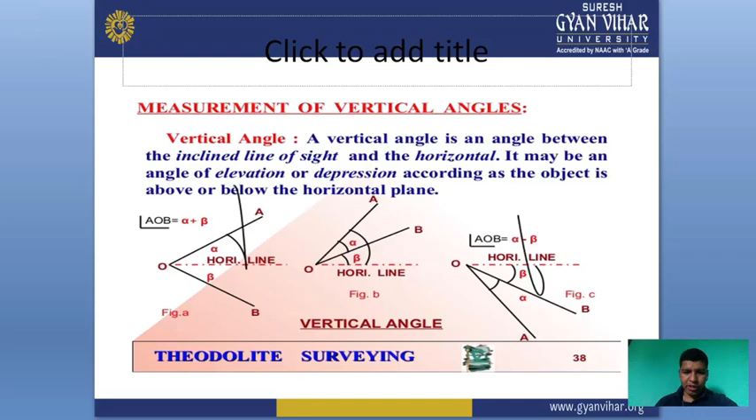See the vertical angle of any sight, that is shown like angle AOB, again angle AOB. There are three figures which show the vertical angles of a theodolite survey.

So what are the uses of theodolites? The uses of theodolites are as follows. Theodolites are used for many purposes, but mainly for measuring angles and scaling points of construction work, for example to determine highway points and points of huge buildings.

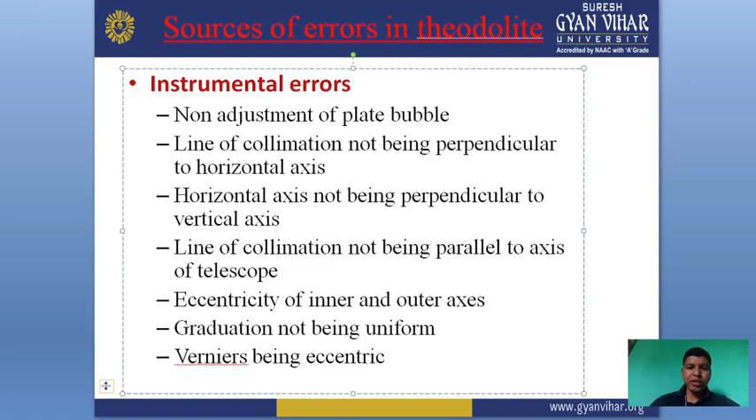Inaccurate centering. This is a very common error, and it is introduced in all angles measured at a given station. Its magnitude depends upon the length of sight. It varies inversely as the length. Inaccurate centering, slip, working the wrong tangent screw, parallax, inaccurate bisection, and other errors are included in observational errors.

Inaccurate bisection means care is not taken to bisect the lowest point visible on the ranging rod. In case of short sights, the point of a pencil or the plumb line may be used instead of the ranging rod.

The error varies inversely with the length of sight. Then other errors such as mistaken setting of the vernier, mistake in reading the scales and vernier, mistake in reading wrong vernier, and mistake while booking the reading can be prevented by checks and precaution.

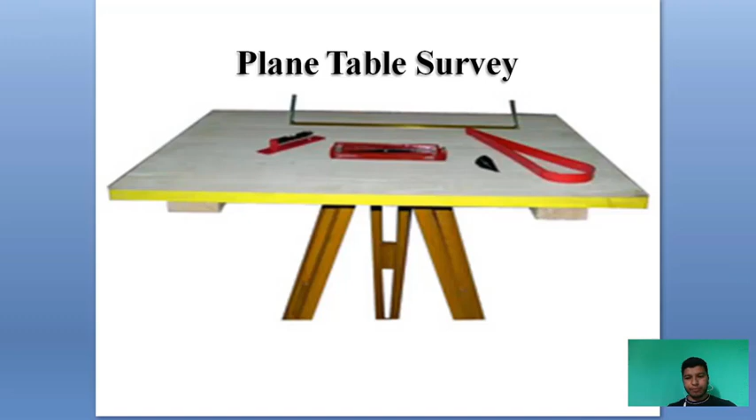and to also understand how field work is carried out with this instrument and how it is useful in engineering. In this topic we will also discuss the principles of plane table survey, instruments, setting up the plane table, method of plane table, advantages and disadvantages, and the sources of errors

in plane table survey. First of all, what is plane table survey, why it is necessary in civil engineering, how it is used, in which method it is used, what are the main advantages and disadvantages, and what are the main principles of plane table survey.

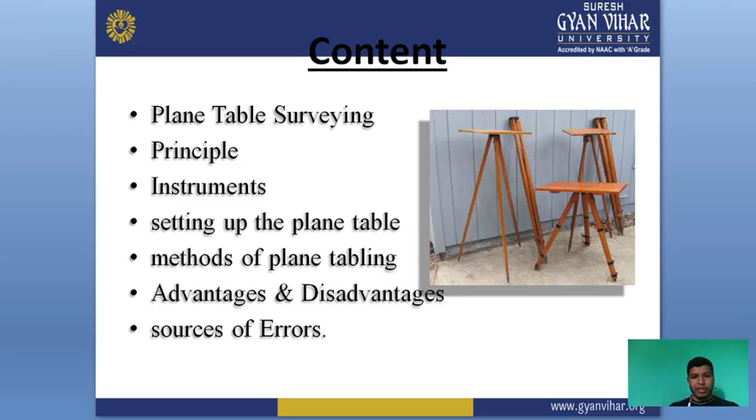Let's start. Basically, plane table survey is a graphical method of survey in which the field observations and plotting are done simultaneously. It is simple and cheaper than theodolite survey. It is most suitable for small scale maps.

The plan is drawn by the surveyor in the field while the area to be surveyed is before his eyes. Therefore, there is no possibility of omitting the necessary measurement. Plane table is also called as plane tabling method.

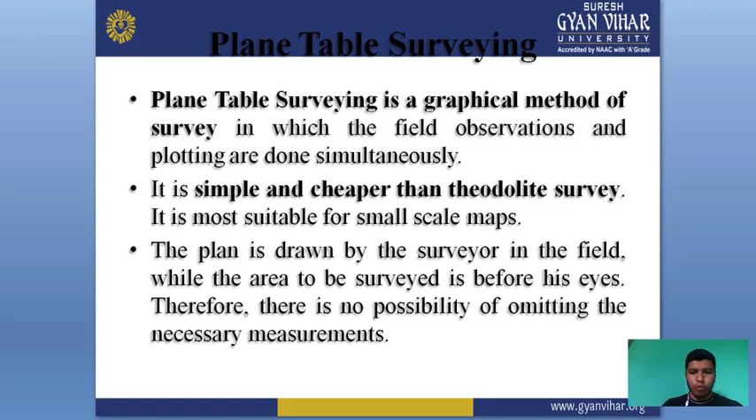The main principles of the plane table survey are: all the rays drawn through various details should pass through the survey station. The position of plane table at each station must be identical. At every station, the table must be oriented in the direction of magnetic north.

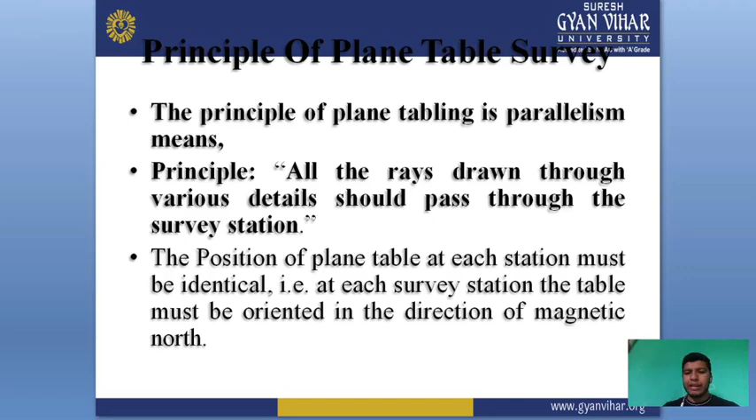The equipment essentially needed for plane tabling is a plane table or drawing board which carries a drawing sheet and is mounted on a tripod stand, and an alidade which provides the line of sight. This is an example of the principle of plane table survey.

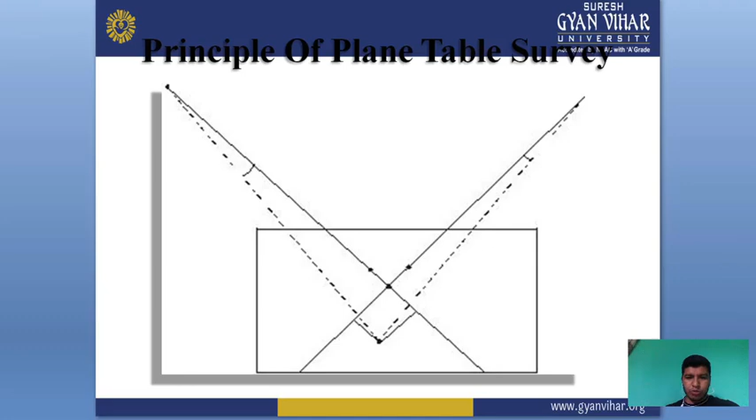We have used a sheet over the drawing board, marking the station which is fixed on the ground, and also marking some points which are shown in the figure.

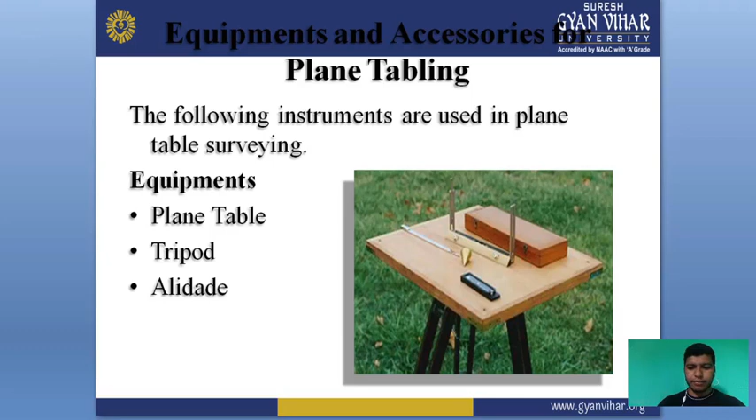The main equipment and accessories used in plane table surveys: the main equipment is the plane table, tripod and alidade. Accessories include trough compass, spirit level, U fork with plumb bob, waterproof cover, drawing paper, pins and drawing accessories.

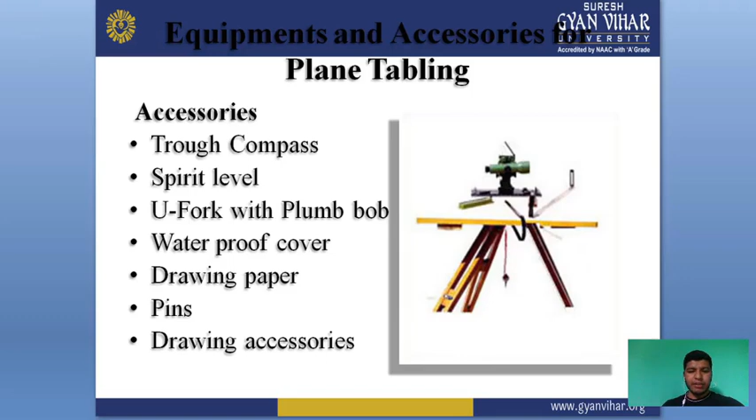The first one is the plane table. The drawing board for the plane table is made from well seasoned wood with its upper surface exactly plane. It is normally rectangular in shape with a size of 75 centimeter into 60 centimeter.

This is the size of the plane table board which is used for drawing in plane table survey, and it is also mounted on a tripod, and clamps are provided to fix it in any direction. The table can revolve about its vertical axis and can be clamped in any position when necessary.

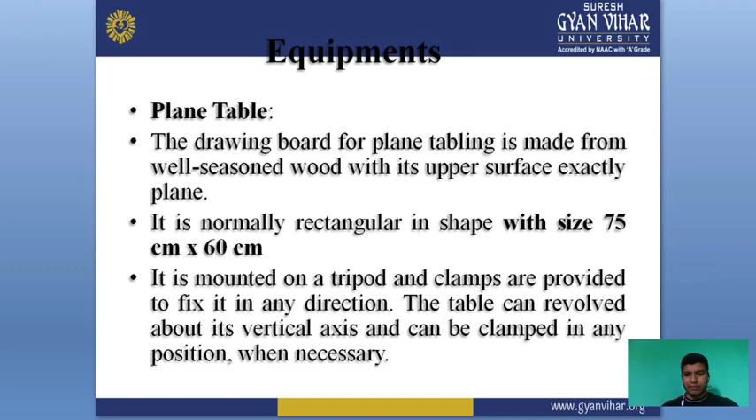This is an example of the plane table, the drawing board which is used for drawing in plane table survey.

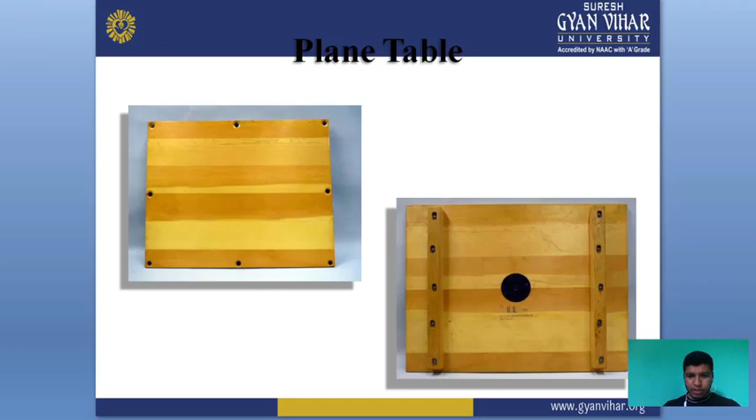It is mounted on the tripod and fixed on the tripod in the ground with the help of clamps. This is the example how we fixed the plane table board and tripod on the surface of the ground for taking the measurement and recording the observations.

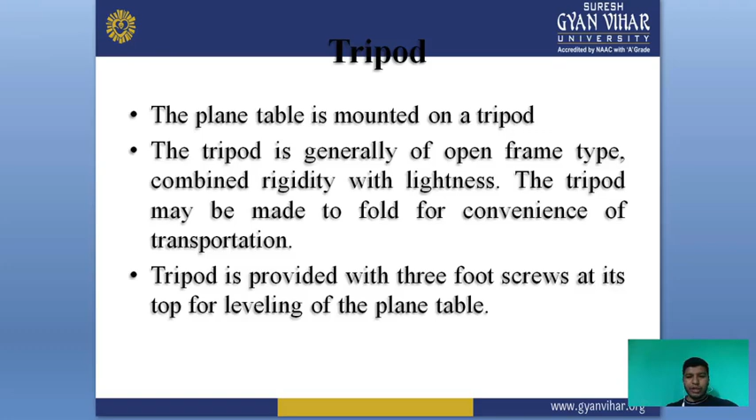Now the next instrument is tripod. What is tripod? Where is it used? Why is it used? Basically the tripod is used in plane table survey for mounting or fixing the board. The tripod is generally of open frame type, combining rigidity with lightness. The tripod may be made to fold for convenience of transportation. It is provided with three foot screws at its top for leveling for the plane table survey.

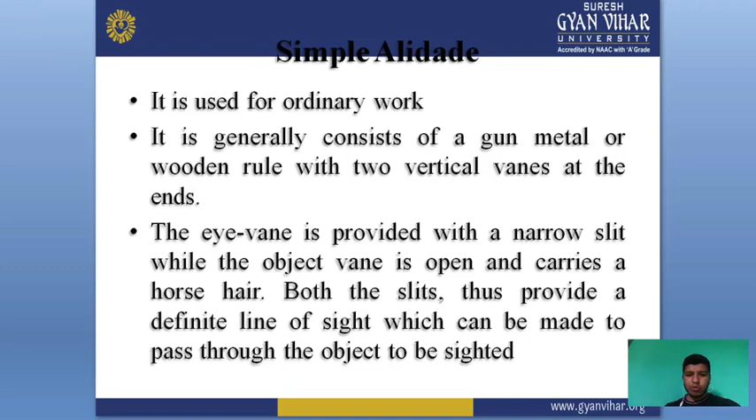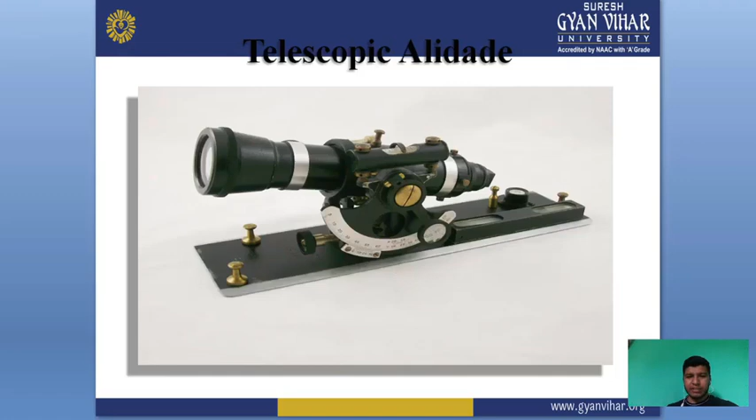In accessories, it also consists of trough compass. What is trough compass? The trough compass is required for drawing the line showing magnetic meridian on the paper. It is used to orient the table to the magnetic meridian. When the freely suspended needle shows 0 degrees at the end, a line is drawn on the drawing paper which represents the magnetic north. Basically, the trough compass is used for showing directions.

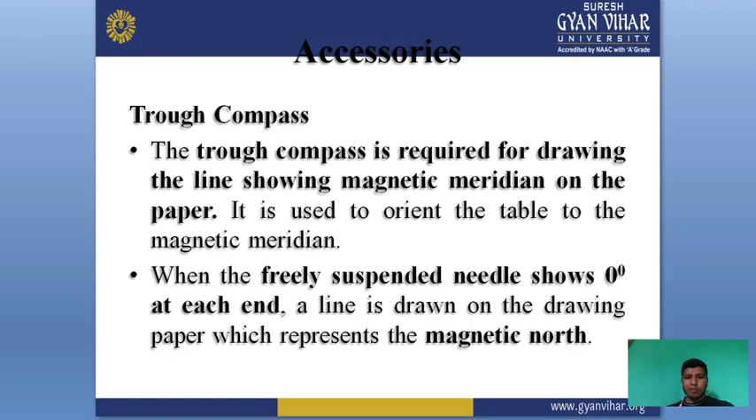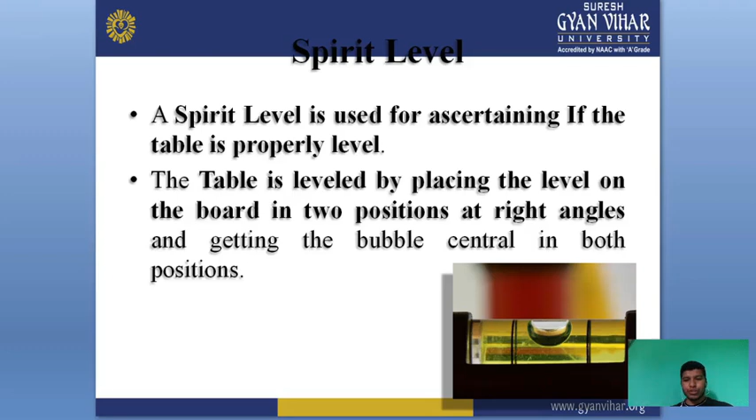Next accessory used in plane table survey is spirit level. Spirit level is used for ascertaining if the table is properly leveled. So it is used for leveling purpose. The table is leveled by placing the level on the board at right angles in different positions and getting the bubble central in both positions. This is the main example of spirit level which is used in plane table survey for leveling purpose. When we level our setup, we can check if our instrument or setup is fully leveled with the help of spirit level.

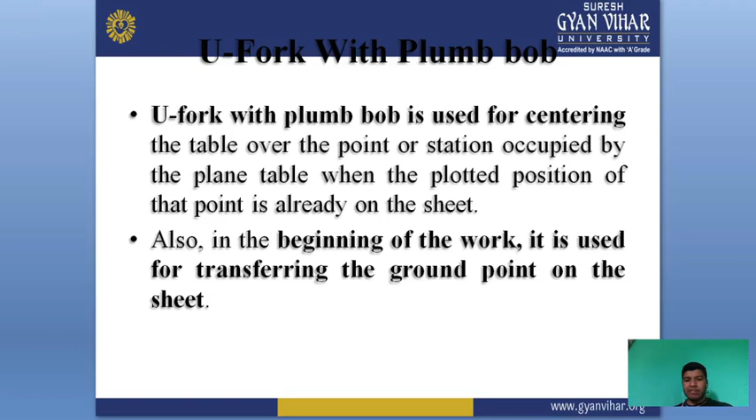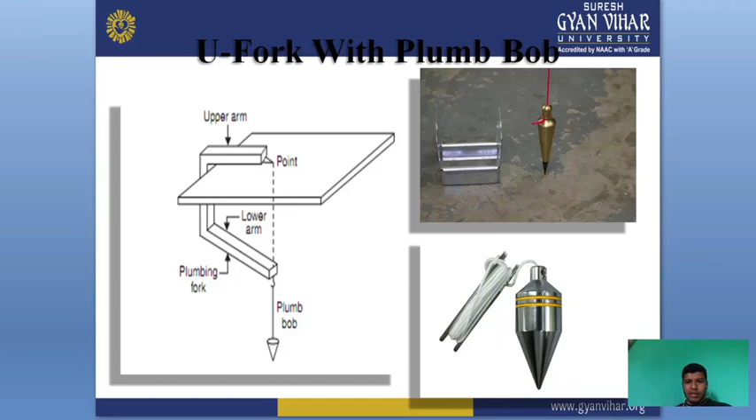Next is drawing paper. Drawing paper is used for plotting the ground detail. When we take the reading, we can draw on the drawing paper as the readings are taken with the help of plane table survey. We can draw the measurement, we can draw the reading on the sheet.

Setting up the plane table. First point is to fix the plane table on the tripod stand. Then second is leveling the table. We have to level our table, then centering the table, then marking the north line, and the fifth and last step is orientation. Orientation means drawing orientation by magnetic needle, or orientation by back sighting.

Advantages and disadvantages of plane table survey. Now we will discuss what are the advantages and disadvantages.

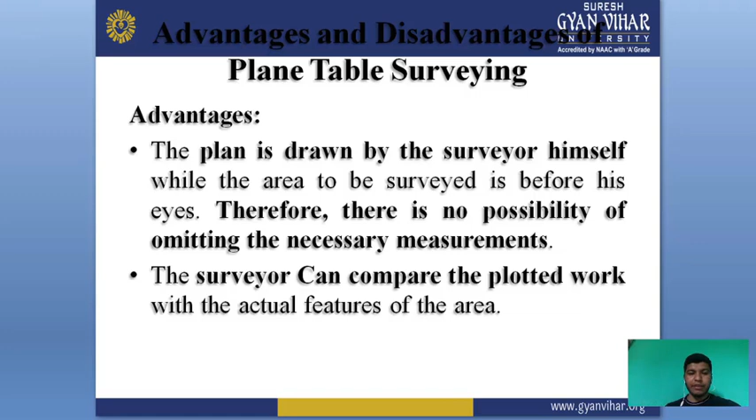The third point is it is the most rapid method used in plane table survey for drawing. It is also simple and cheaper than theodolite. It is more suitable for small scale maps. No great skill is required to produce a satisfactory map, and work may be entrusted to a subordinate.

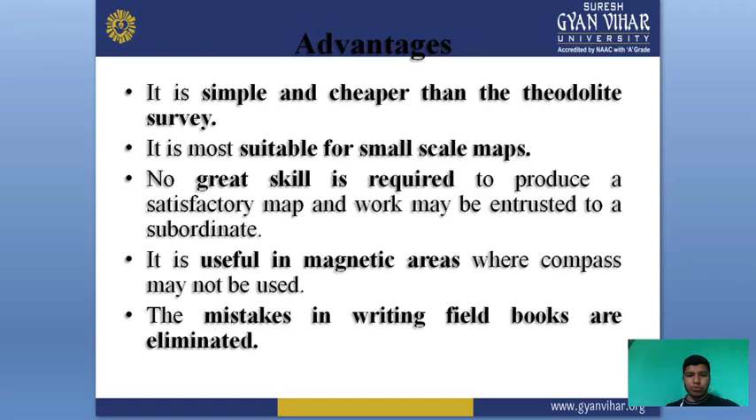It is useful in magnetic areas where compass may not be used. The mistakes in writing field books are eliminated.

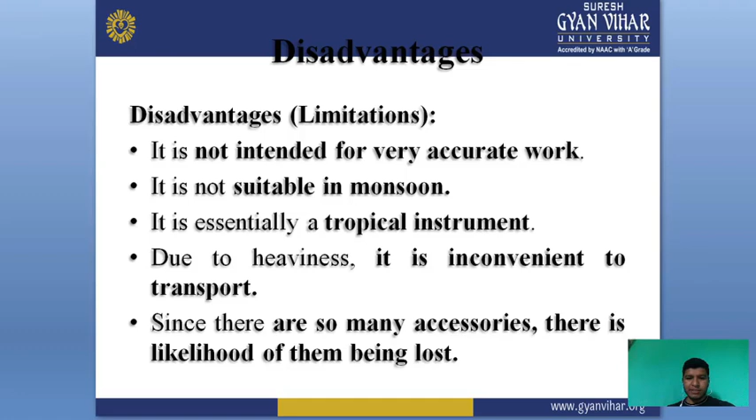Now disadvantages: it is not intended for very accurate work. It is not suitable in rainy season like monsoon. It is essentially a tropical instrument. Due to heaviness, it is inconvenient to transport. Since there are so many accessories, there is a likelihood of them being lost.

Hello everyone. Today we will discuss a new topic, Compass Survey. In this topic we will discuss what is Compass Survey, what are its advantages and disadvantages, and why it is used in civil engineering. So let's start. What is Compass Survey?

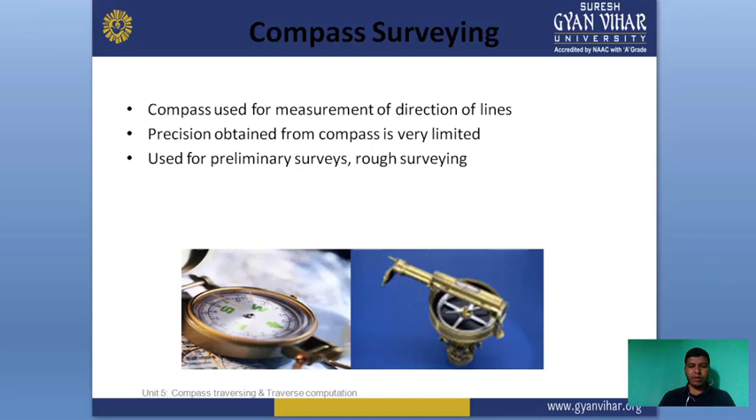Compass Survey is an instrument used for measurement of the direction of a line. Precision obtained from compass is very limited. It is used for preliminary survey, rough survey, and for measuring directions like north, south, east, west. There are two types of compass survey: prismatic compass and surveyor's compass.

There are also some basic terms used in compass survey, like meridian, bearing and azimuth. Meridians are reference directions based on which the direction of a line is measured. The first is true meridian, which is constant. Magnetic meridian is changing, and arbitrary meridian is constant again.

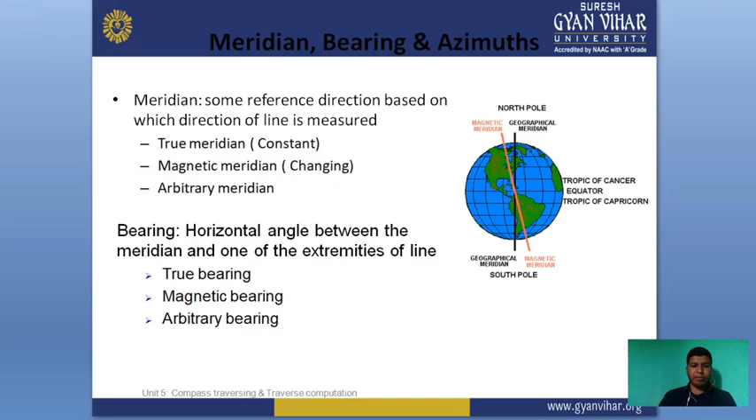Bearing is the horizontal angle between the meridian and one of the extremities of a line, like true bearing, magnetic bearing and arbitrary bearing. True meridian is defined as the line passing through the geographic north and south pole and the observed position. This position is fixed, established by astronomical observation, and is used for large extent and accurate surveys like land boundary. Magnetic meridian is defined as the line passing through the direction shown by a freely suspended magnetic needle.

It is affected by many things like magnetic substances, and its position varies with time. Assumed meridian is the line passing through the direction towards some permanent point of reference, used for surveys of limited extent. There is a diagram that shows the assumed meridian of a boundary line.

The disadvantage of this assumed meridian is that it cannot be re-established if points are lost.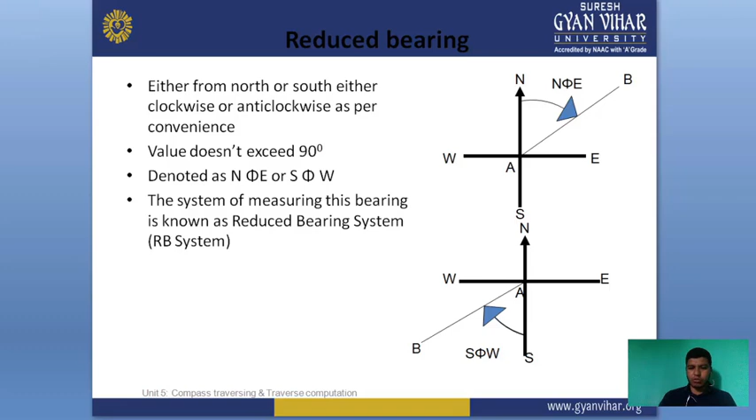In short, RB system, as shown in the figure. There are directions shown, a line showing north and east directions, and south and west directions. Whole circle bearing is like azimuth.

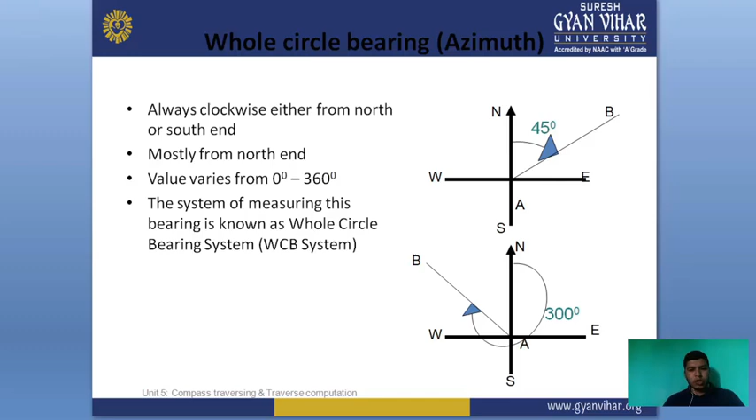Whole circle bearing is defined as always clockwise, either from north or south, but mostly from north, with values from 0 to 360 degrees. It varies between 0 and 360 degrees, always measured clockwise from north or south, and this is also known as the WCB system. Next is fore bearing and back bearing.

Fore bearing is defined as the front angle of any line between two points, and back bearing is the backside angle between the two points. In the case of a line, fore bearing is the bearing from A to B, as shown in the figure, and the back bearing is the bearing from B to A.

The relationship between fore bearing and back bearing in whole circle bearing is: back bearing equals fore bearing plus or minus 180 degrees. Use the plus sign if fore bearing is less than 180 degrees, and use the minus sign if fore bearing is greater than 180 degrees.

So this is the system of calculation, and it also shows the relationship between forward bearing and back bearing in the whole circle bearing system.

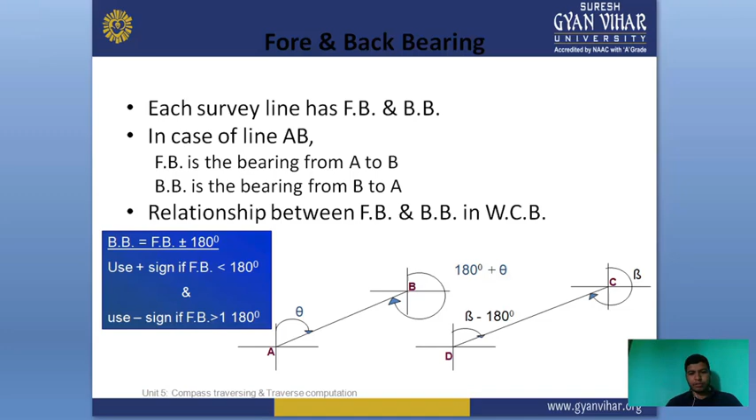The calculation of angle from bearing and vice versa in whole circle bearing: first, it is easy and no mistake when the diagram is drawn. Use the relationship between forward bearing and back bearing, and knowledge of basic geometry. So this is the calculation process of angle from bearings like forward bearing and back bearing.

In the whole circle bearing system. Whole circle bearing system is measured in clockwise direction from the north end or north and south end.

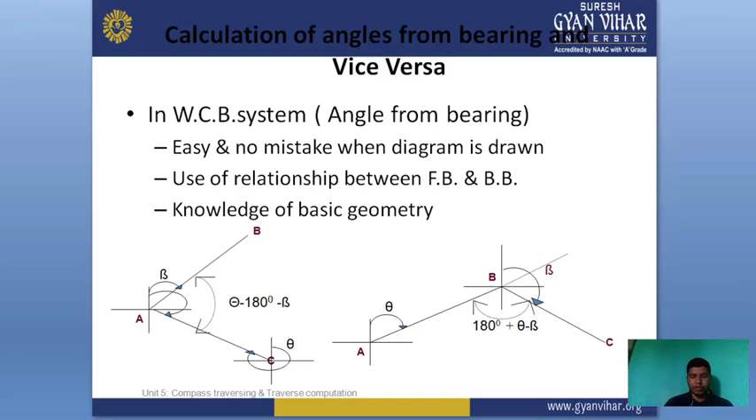Error in compass survey: local attraction and observational error. What is local attraction? Local attraction is the influence that prevents the magnetic needle from pointing to the magnetic north pole. Unavoidable substances that affect it are underground iron pipes, high voltage transmission lines, electric poles, etc. Influence caused by avoidable magnetic substances, such as the instrument, wrist watch, or keys, does not come under local attraction.

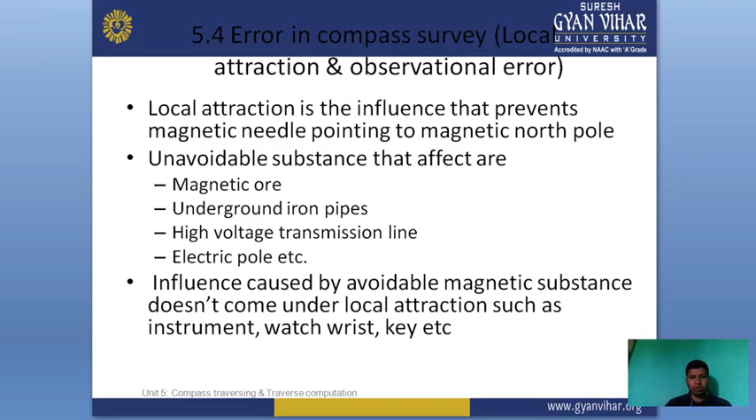Local attraction is the type of influence caused by things like high voltage transmission lines and electric poles. These are the local attraction. Error in compass survey: detection of local attraction. How to remove the error of local attraction?

First, by observing both bearings of a line, forward bearing and back bearing, and then noting the difference from 180 degrees in case of whole circle bearing (WCB), and equal magnitude in case of reduced bearing. We confirm local attraction only if the difference is not due to observational error. If detected, it has to be eliminated.

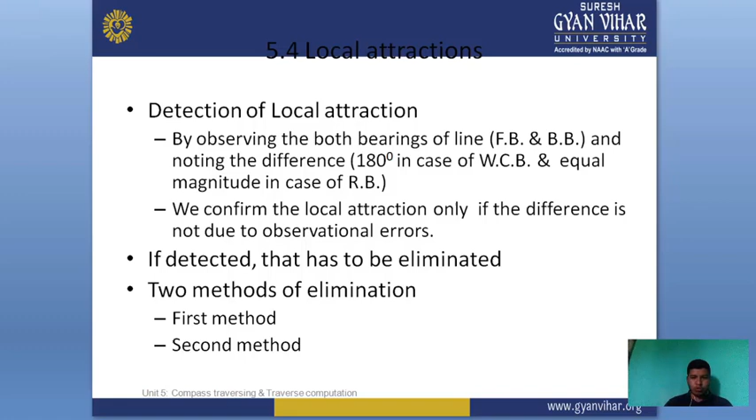There are two methods of elimination. In the first method, the differences of back bearing and forward bearing of each line of the traverse are checked to see whether they differ correctly or not. The one having the correct difference means the bearings measured at those stations are free from local attraction. Corrections are accordingly applied to the rest of the stations.

If none of the lines have the correct difference between FB and BB, FB being forward bearing and BB back bearing, the one with minimum error is balanced and the similar procedure is repeated. A diagram is a good friend again to solve the numerical problem.

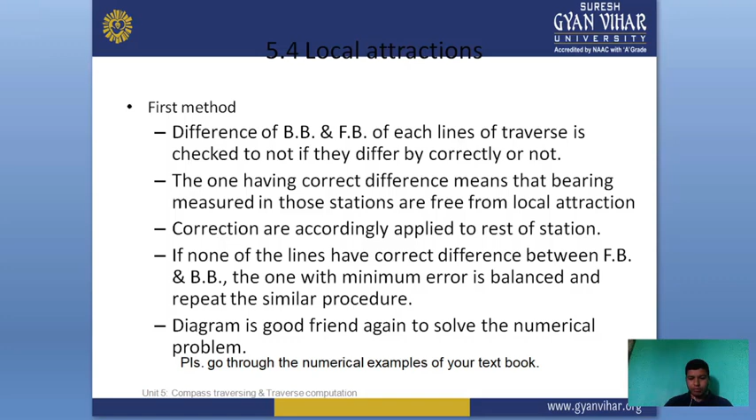The second method is based on the fact that the interior angle measured at the affected station is right. All the interior angles are measured. Check of the interior angles: the sum of interior angles is equal to (2n minus 4) right angles, where n is the number of traverse sides. Errors are distributed, and bearings of lines are calculated with the corrected angles from the line with unaffected stations.

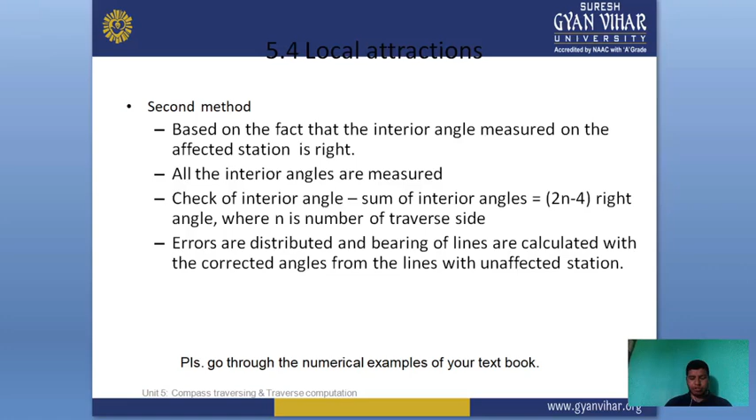Next is traverse types, compass and chain survey. We will discuss what a traverse is. There are two types of traverse: open traverse and closed traverse. First we will read about the traverse, and then we will discuss the types and their difference.

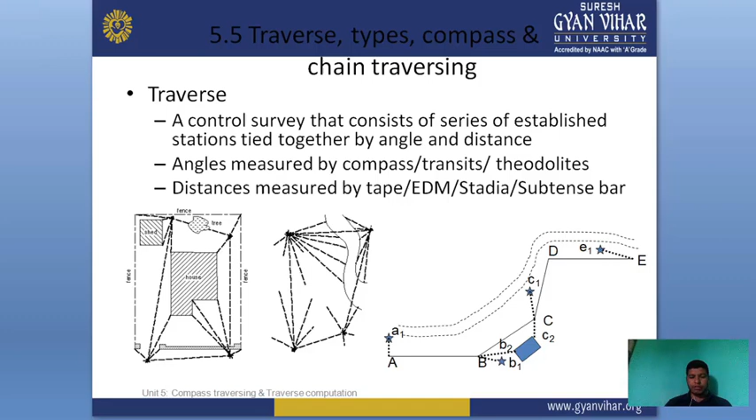What is a traverse? A traverse is a control survey that consists of a series of established stations tied together by angle and distance. Angles are measured by compass, transit, or theodolite. Distance is measured by tape or EDM, the electronic distance measurement machine, an advanced survey instrument used for measuring distance from one point to another. Traverses are used to locate details, topographic details, layout, and engineering work.

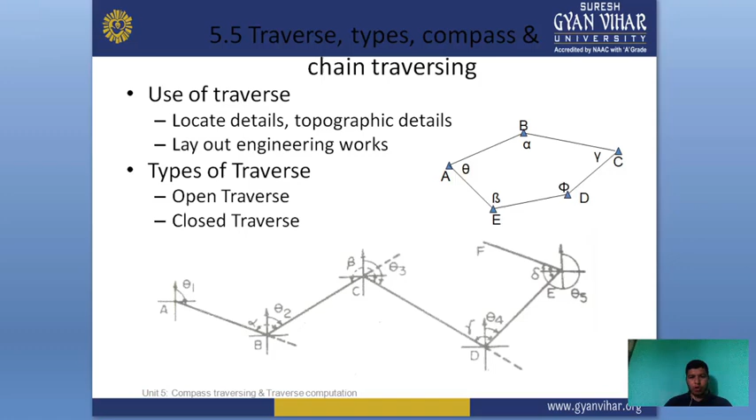As I mentioned earlier, there are two types of traverse, open traverse and closed traverse, shown in the figure. The first one describes the open traverse, and the second one the closed traverse. An open traverse geometrically does not close. It means it is totally open, with no geometric verification. Measuring technique must be refined. It is used in route surveys like roads, highways, irrigation and coastlines. The diagram shows the open traverse.

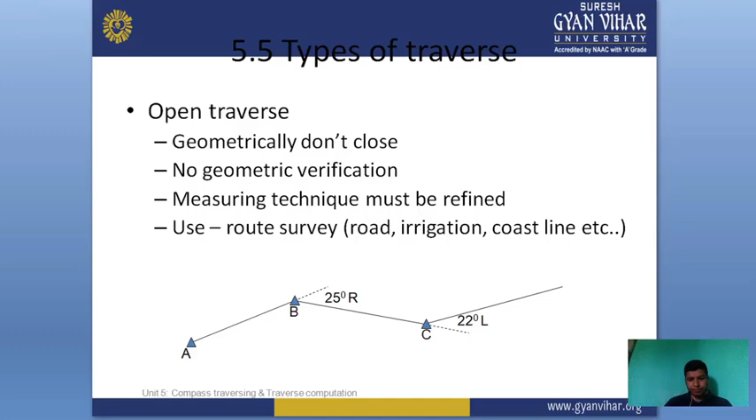An open traverse is when we measure any distance and the first point and the last point are known. The closed traverse is defined as geometrically closed, beginning and closing at the same point. The starting point and end point are known. That is known as a closed traverse.

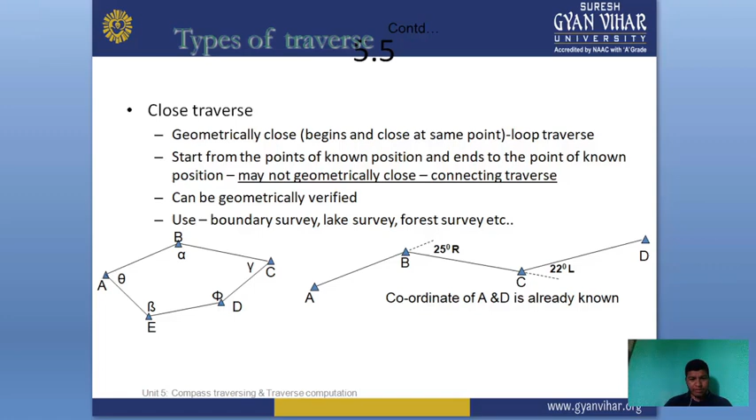Loop traverse. A traverse starting from points of known position and ending at points of known position may not geometrically close: a connecting traverse, and it can be geometrically verified. It is used for boundary survey lines, lakes, forest surveys, etc. This is known as a closed traverse, shown in the figure where the points are known.

Theodolite survey: the system of surveying in which the angles are measured with the help of a theodolite is called theodolite survey, or it is a commonly used instrument for